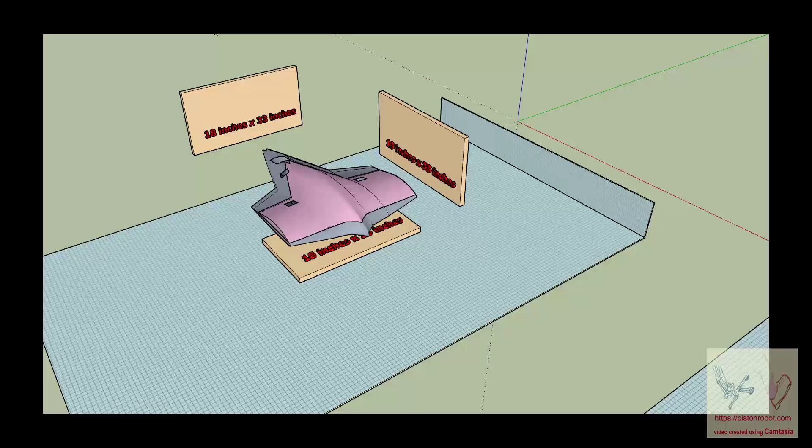We're looking at the Smart Mortar. This is inside of SketchUp Pro 2021. This mortar is made using one of the standard airfoils. It is the AH80136 airfoil. And this flying device has been made inside of an aeronautical program that can give information about the device. It's 4.16 feet long, and it's about 33 inches wide. Thickness wise, it's about 7 to 9 inches.

This right here I'm showing is just the Smart Mortar itself, with nothing inside of it. You can see that these are holes cut into it. Here's a hole right here and a hole right there. And we can actually select this top piece and hide it if we want to, and you can look around inside of there. So there you go.

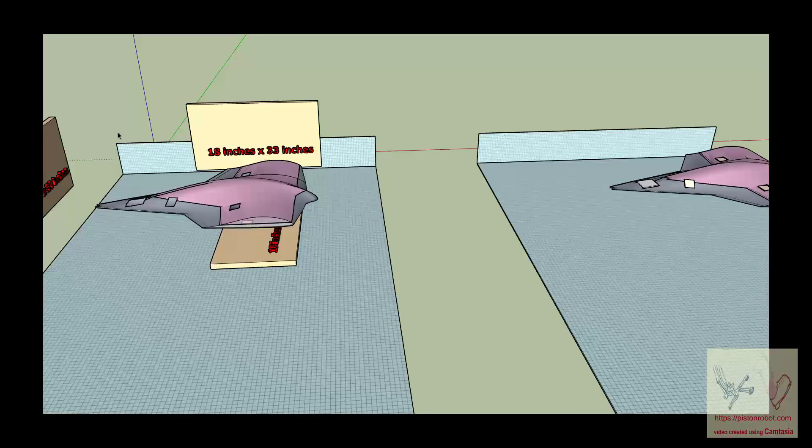These are other views of that mortar, showing that actually inside of the mortar are parts, and these parts include ailerons that can affect the flying of the mortar. Because of the nose pitch down effect of airfoils that have camber, there's an aileron or a flap in the back that acts to keep the mortar from flipping over as it flies.

So use of these ailerons gives you the ability to independently control the pitch of the Smart Mortar. You can also independently control the roll of the Smart Mortar.

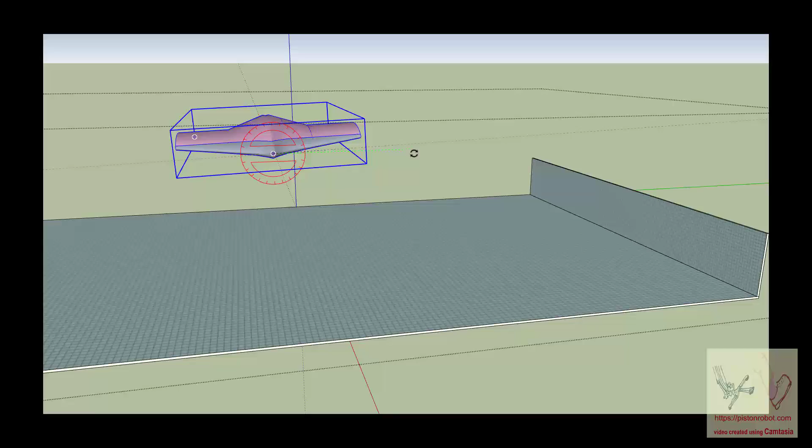And these two ailerons right here, because of how they're located kind of upwards and flat onto the edge of the back of the Smart Mortar, they give you the ability to control the yaw. So this flying device has all of the properties of a normal flying airplane: pitch, roll, and yaw.

The aeronautical program says that the weight of the structure itself is about 21 pounds for the skin. The skin is thick enough that it acts as the airframe structural member. Inside of the mortar is the payload.

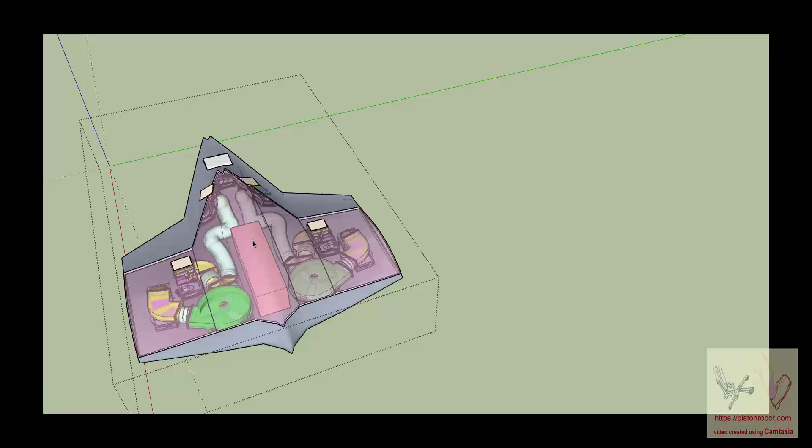The payload weighs 12 pounds. I've already discussed what the payload is with respect to a military device. Again, we can take this top half of the mortar and hide it. So here's the payload. Here are these ailerons. There's the flap that controls the nose pitch over.

Of interest, there are also in this flying device two fans. These fans can go in either direction. This fan can spin in a direction where it suctions air out of this opening in the Smart Mortar, takes that air and blows it out of this side, and there's two different fans.

The effect of these fans is that if the Smart Mortar, either by hitting a headwind or maneuvering, gets itself into an airspeed where its flight control surfaces do not have enough size to control its flight, then it can spin up these fans and blow air to give the ability to do a pitch, roll, and yaw, because some of the air is diverted back here. So it can do pitch, roll, and yaw even if it's flying so slowly that the flight control surfaces are too small to have an effect on it.

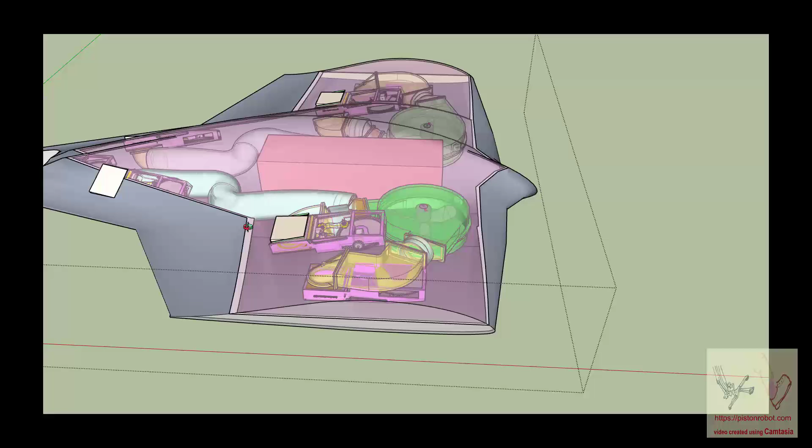And if this Smart Mortar is pointed straight up and given an initial airspeed of 888 feet per second, and if you keep it flying at a very slightly negative angle of attack so it has no lift, then it will fly in a straight line straight up. Based on the aeronautical calculation package, it will fly straight up for 15 seconds.

At the end of 15 seconds, its airspeed will be 163 feet per second, which is 111 miles per hour, which is 100 knots. At that point, the flight control surfaces can bring the Smart Mortar into a nose pitch down, which causes it to go from vertical flight to horizontal flight. At this point, it will be flying horizontally at 163 feet per second. The altitude will be 7,400 feet. The glide angle will be 8.57.

So at this point, the Smart Mortar will be 7,400 feet in the air, flying at a slight decreasing angle of flight. It's not horizontal flight; it will fly 8.57 feet horizontally for every 1 foot that it drops in altitude. And this can all be demonstrated with the aeronautical program. The question that comes out of this is, well, what does all of this mean? And that's the next thing that we're going to get into.

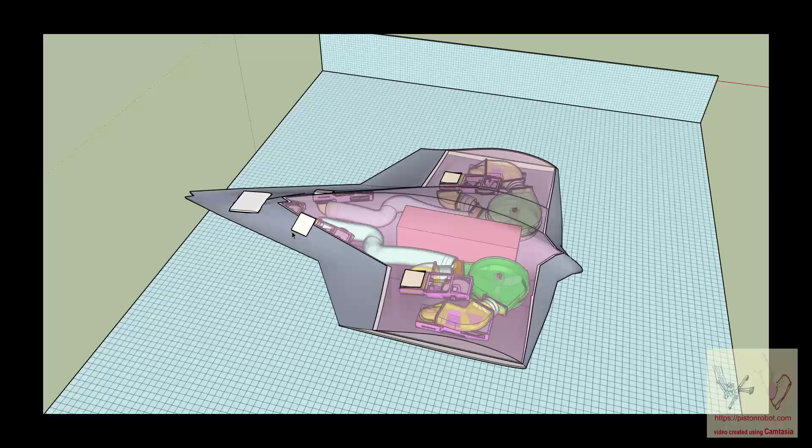But these are just standard ailerons in the sense that, for example, if you wanted to do a roll where the right wing went up and the left wing went down, you would extend this aileron so that it generated an upward force on this wing, leave this aileron flat, but extend this upper aileron. So you have a downward force pushing down on the left wing and an upward force pushing up on the right wing, and it rolls it to the left. This is very basic aeronautics.

Yaw, obviously: if this one extended and that one didn't, it would generate a push that would tend to yaw the flying device off towards the right.

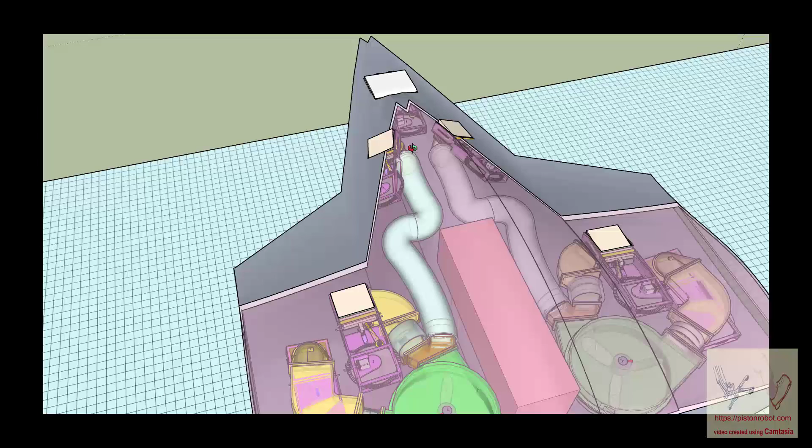Finally, because of the camber of normal airfoils, there's a tendency for any flying airfoil to pitch over. And that's just a feature of camber. Most airplanes have a tail, but this one, because it's going to be launched at very high speed out of a pneumatic cannon, has to have a shape that would allow that. And so this is all tucked down and flat in the back of the flying device during the launch phase. As soon as it clears the pneumatic cannon, this begins to extend and acts to counteract the nose pitch down effect of an airfoil with camber.

And so all of these ailerons here, 1, 2, 3, 4, and there's 2 more on the bottom, all of those are exactly the same. The central flap aileron is different, and we're looking at these 6. They're all exactly the same. And what I'm showing here is the mechanism for how this works. I have picked off of the internet a little drawing, and these are available on the internet for $3 a piece. And here's your size. It's just nothing more than a gear motor.

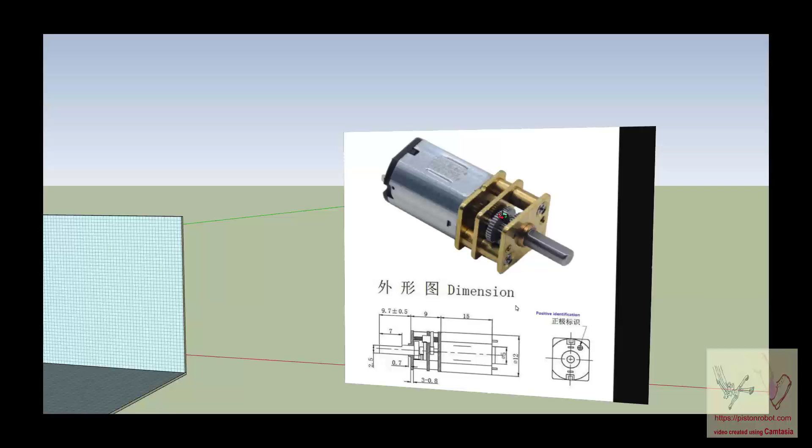And what I did is, remember, this is a device. This payload has 4.5 pounds of C4 in it and other payload features to affect the way that it acts as an explosive ordnance. All of that is discussed elsewhere. So this whole device is going to wind up not existing anymore when it gets to its target. So you don't want to make $50,000 components inside of this thing.

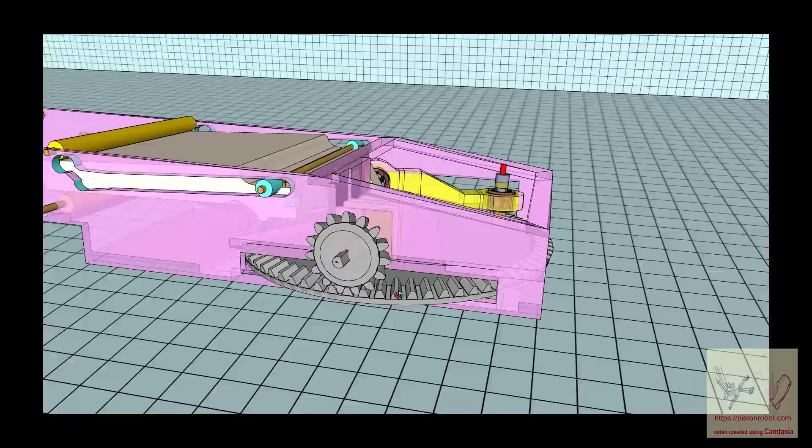And also there may be an argument. Someone might say, well, I don't think that's where the aileron should be, it should be over there. And so I made them where they're all separate and you can move them around and get them wherever you want to put them. All I'm demonstrating here is their normal method of working, and the gear motor generates through the gears a torque, and the torque is increased and can turn this gear here. When this gear here turns, it turns this horizontally oriented gear, and when that horizontally oriented gear turns,

it moves this. These are dual 2-track ball bearing spherical bearings. There's a bolt here. These are just markers so I can move it around without getting confused, but in the real device they're not going to be there. But this would turn, that would go back. There are some structures here on this plate to control and force it to move where it's supposed to.

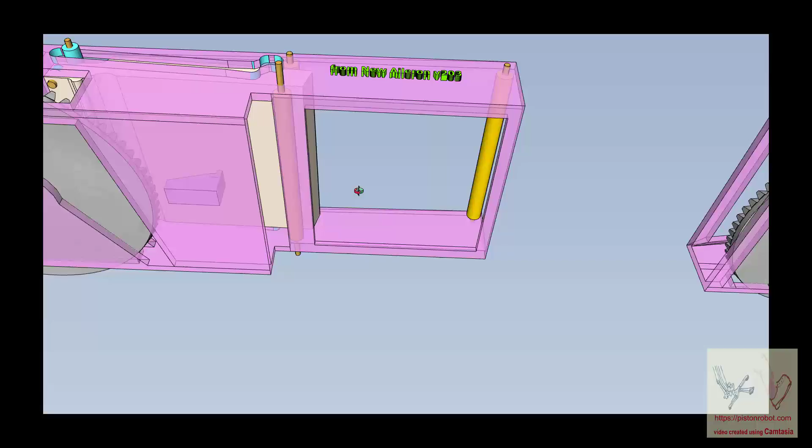Remember that we want this aileron to be able to adjust itself in a manner where you can take air from the fans and blow air through that opening. So you have to have a condition for the aileron where it is not in there at all. It's not in the way. So in this condition, it's moved all the way back. And then as this motor turns, this gear turns, that gear turns, this goes forward, and we're closing off this opening.

And then at this point, this indexes up and sits nice and flat, because one of the aileron requirements is that it protects the interior of the flying device during the cannon launch and acts as a protection for it during high airspeed flying. And you can see here that there are ways that this aileron can move itself and adjust its angle in a manner where it never really opens up the interior of the flying device to the high speed air.

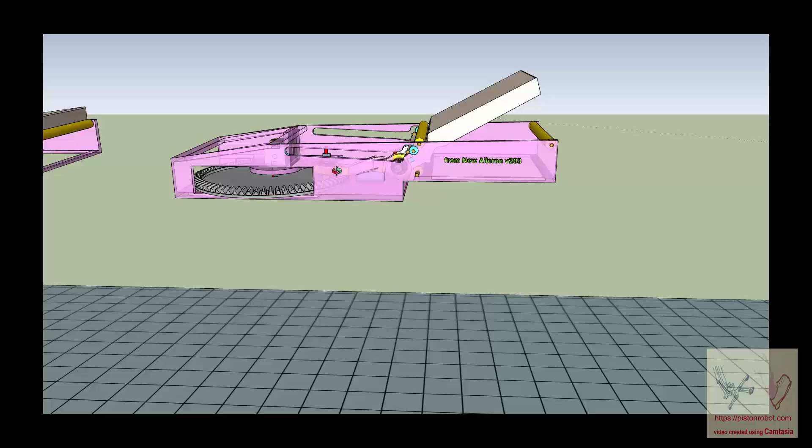And this angle is about maximum 7 to 8 degrees of angle of attack, which is more than enough to control the flight of this thing when it's going 800, 600, 500 feet per second. As it slows down, with further advancement of this motion arm, this thing can extend to give you even more angle of attack, to give you control of the flying device at low air speeds. And so that's it. That's just the aileron that controls yaw, pitch, and roll.

The other flying part that we'll discuss briefly is the central flap in the back that prevents the airfoil shape of the Smart Mortar from doing a nose pitch down rollover, and that's just showing that this is another airfoil. Again, here's the little gear motor that controls it, and it is slightly different from the other ailerons in the sense that this one does not have any air blown up through it, so it doesn't have any use at extremely low speeds where you would vent air to it. It's not needed.

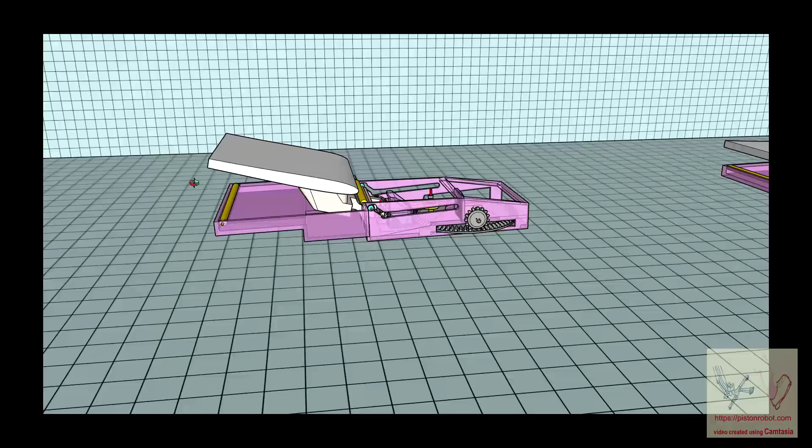It's really for the high speed stuff. And you can see that when the Smart Mortar is launched and it's going through the pneumatic cannon barrel at 800 feet per second, this flattens itself down and is held in place by the strength of these connections. And there's also a little set of wheels here. We can get more details, but when this is all locked in place, this thing is held down and it can't go anywhere. And it stays like that until the Smart Mortar exits the cannon barrel.

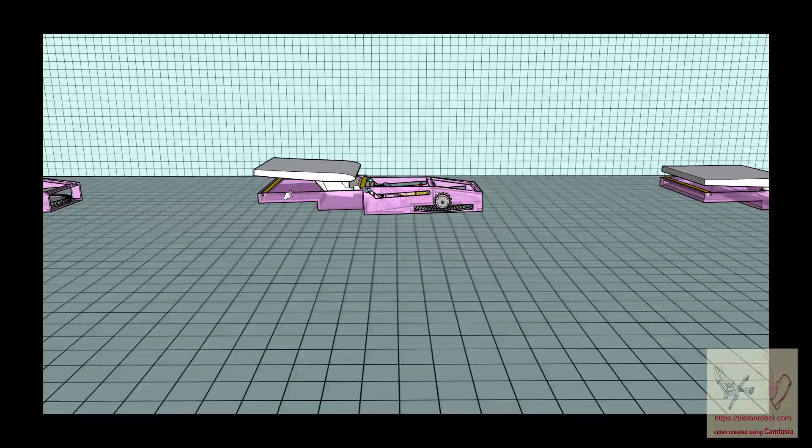Then again, it's the same operating principle as before. This gear motor turns on, this gear turns, it rotates this, it pushes that back. And what happens is first it lifts it up so that it can be like the tail of a flying plane. And it has a little bit of a negative angle of attack, so it pushes down on the back end of the Smart Mortar so that the Smart Mortar loses its tendency to a nose pitch down flip over.

And again, remembering that all of these parts, other than these spherical ball bearings, could be made of plastic. These shafts probably need to be alloy stainless steel. That would have enough strength to control it. Remembering that this Smart Mortar is going to disappear and not exist anymore when it completes its mission. So we do not want a $20,000 central flap either.

And we've discussed the principles of the Smart Mortar in more detail elsewhere. It needs to be inexpensive, where a small outpost could use it, where they could bring the explosive power of this payload against enemy forces. This would be inexpensive enough that the higher level commands would not care if they use it or not. And they would have 200 or 300 of them. They would have their own air force. It would have a targeting accuracy of plus or minus 2 feet inside of its range of 4 miles.

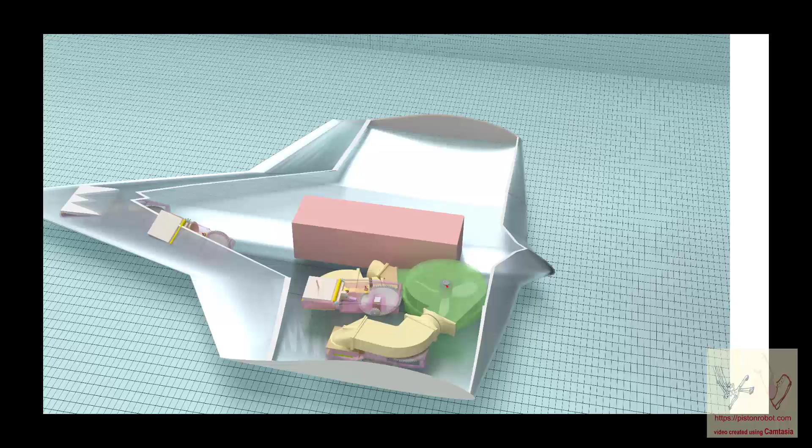I just switched it to a more magnified view. But anyway, the enemy forces would say, look, let's just forget it. If these guys have this 4 mile radius, 8-mile diameter circle where they have this thing, just let them have it. We don't want that property. It's not worth it. All they do is bomb us, all the time with this thing, and there's nothing we can do about it. That was the point of the Smart Mortar. And I think it needs to be inexpensive, or they will never get permission to use it.

And that means I think it needs to not have a motor, because it doesn't have to have a motor. It doesn't have to have a propeller. It doesn't have to have thrust. It doesn't have to have fuel. It doesn't have to have all of the complexity associated with powered flight.

And the problem that comes up is if you keep it at 800 feet per second, which is less than the speed of sound, it only goes up 7,400 feet before it can't go any higher, because it will be at an airspeed that's too low for a decent gliding angle. And I was very nervous that, this is such a great little thing, except it's at 7,000 feet. They're going to see it and simply shoot it. And I just was wondering, how hard would it be to shoot this thing anyway?

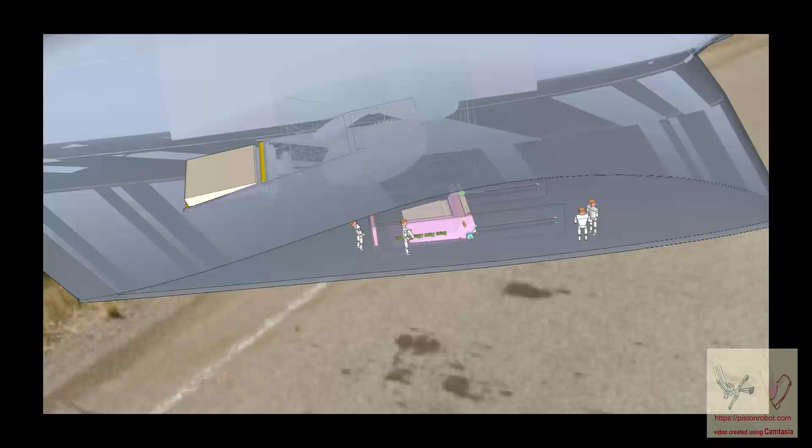And I decided I would make a big one, and I put my little robots inside of it. I was just enjoying myself and having some fun. But I did do a kind of a photo shoot with it up in the mountains, flying along over this road. And I began to work through the issues associated with, okay, it's there, it's in the air, they can shoot at it. Is this really a failure?

And again, this was really just to have some fun. This would be a gigantic mortar. I had a few of my little mannequins that I put inside of it. This guy here, he's kind of looking at the flight controls, and I was going to tell the story that a group of them said, well, we're not flying around in this thing if we can't see where we're going.

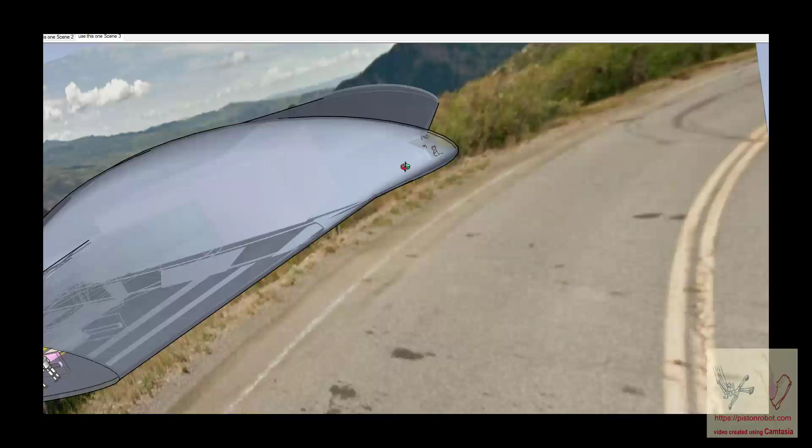So up here in the front of it, I put some windows, and you can see them as it's flying. They decided to do a low pass over this road, and I have them in there in the front of it looking through the window. Anyway, let's go look at the issue of visibility.

All right, before we get to visibility, there's one other thing we should talk about. Here we've got them, they're flying off the mountain on their way to somewhere, and they've launched one, and he's kind of been loitering a little bit, so that the cannon construction is probably going to be able to launch about once every 30 seconds, maybe every 40 seconds.

So when you launch this one, if you want them to come in and land on the target, bang, bang, this guy kind of has to loiter a little bit so this one can catch up. And I wanted to bring out the understanding that there is space in here. You saw all those parts, but there's space in there, and you need flight control.

Flight control is going to need microelectronic solid state circuitry. Probably drill a hole here and a hole here, and let the device itself be a pitot tube so you can get altitude and airspeed. There'll be a GPS in there so it knows where it is. There'll be an incline measuring device to measure inclination of the device in all three axes.

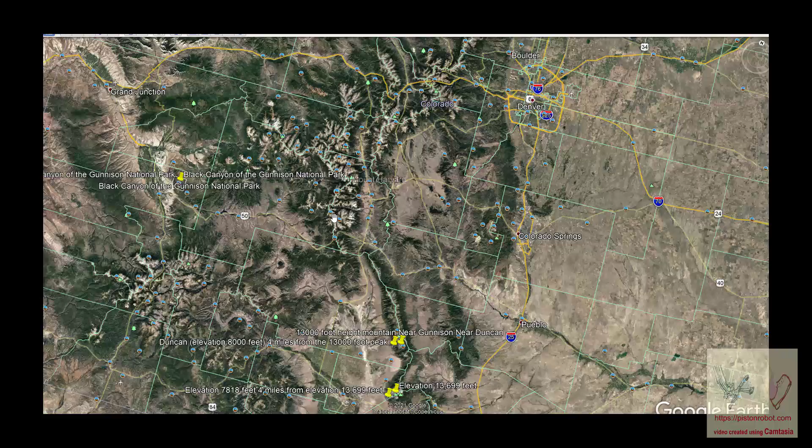Google Earth seemed unhappy about showing me the Grand Canyon, so I decided not to do that and went nearby and looked around and found this Gunnison, Telluride. Gunnison is a national park around in here somewhere. Gunnison National Park, and you can see there's these mountain peaks, or no, they're not really mountains, they're just high hills. All right. Well, I had to get some rearrangements here. There's the Grand Canyon.

When I did this before, I could not get Google Earth to show me the Grand Canyon. I don't know why. But it wouldn't. You can see down here, we got the longitude and the latitude and the elevation of the ground. It's not the elevation. The eyeball elevation is 1,300 miles. The ground itself right here is 1,200 feet. Okay? And since Google Earth would not show me the Grand Canyon that day, I decided to go somewhere else. And I found this Gunnison National Park.

And what I wanted to do, one of the things that Google Earth has is Google will take its little car and drive along, and the car has a camera in it. Here is Gunnison. And the camera does a street view version of the view. So, for example, we can take the little street view.

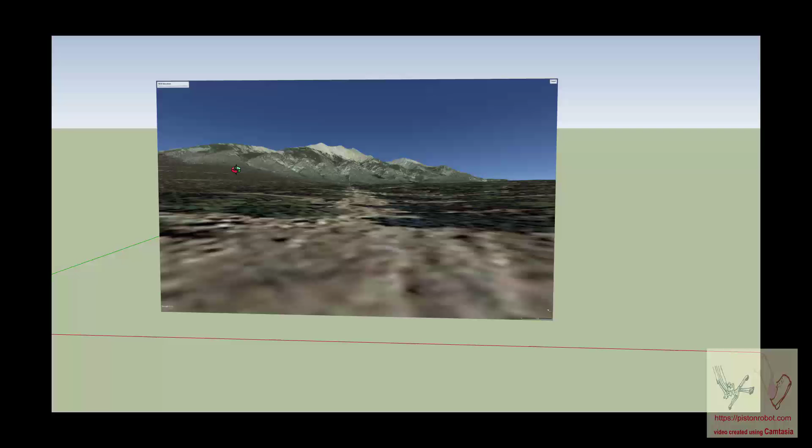And one thing I can say is that, from a physics viewpoint, this part of this image is what we call, I think, flatland, the horizontal part. And this part of this image going this way is the vertical part. So we can actually cut this image in half. And it allows us to put it into the 3D drawing program. This is not perfection level imagery, but you'll see what happens.

So I went and cut it. And this is nothing more than the flat horizontal portion of the picture now existing as a horizontal plane. And this is the vertical portion of the picture now existing as a vertical plane. And I put sea level at zero feet. And if you go up from there to here, you get to 8,156. And so that little guy at Gunnison was standing at 8,156 feet.

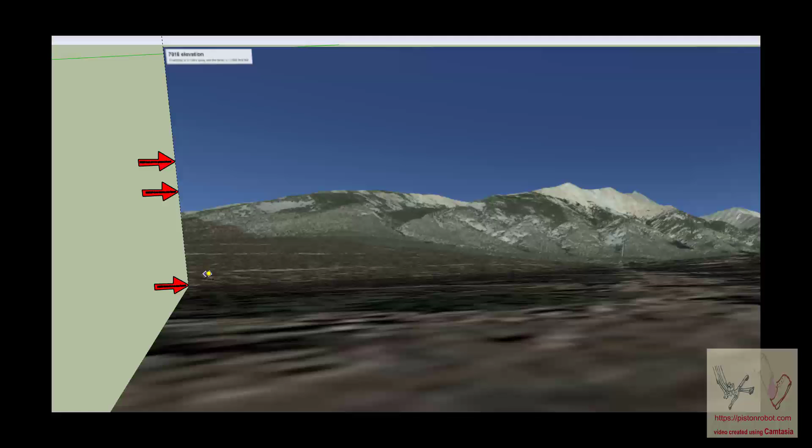So we now have this as 8,156 feet, and we happen to notice that that peak was 13,699 feet. And so this distance from here to here, again, SketchUp does all this data for you, but if you go up to here, we've gone up 5,531 feet. But if you go down here to sea level and go up, it's 13,684 or whatever. I mean, it's at that level.

And so the mortar itself flies along at 7,253 feet. But again, that's going to be 7,253 feet above this ground level down here. So if the Smart Mortar was flying around, it would be right up in here. And the other thing I wanted you to see, from here to there is 4 miles. So that's the range that this Smart Mortar flies through.

And one of the limitations of the 3D drawing program is that it just creates a space of how much space it's drawing in. And if you get little tiny things inside of great big spaces, it gets where it won't show them.

That's how it is. And I got these lines in here for no reason other than to just show me where I'm supposed to be looking. But if we come zooming in here, you can see that now I have a little trouble drawing humans because they're such rounded organic shapes.

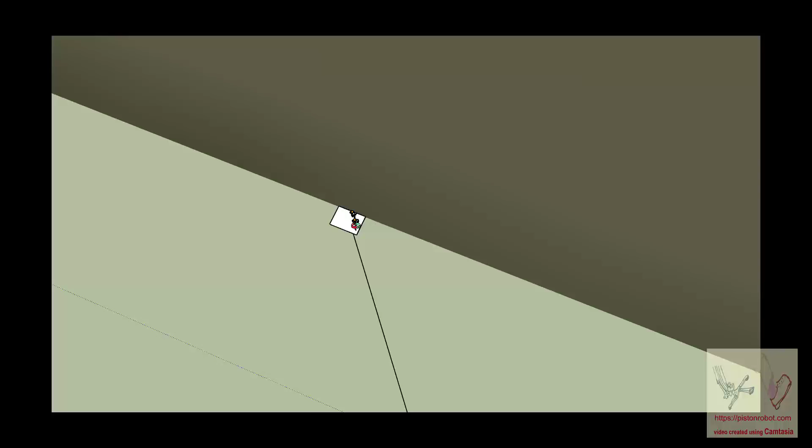And I've got these little mannequins here sitting in as observers. And I'll show you what they look like. I can't get much closer than this to them in this view that has a panorama as big as this in it. Okay, so this is the two little

mannequins, and they are my representation of a human from the top of his head to the bottom of his foot is 6 feet. So he's 6 feet tall. He's got a head and face, eyes. One guy's sitting here, and they're sort of sitting on this little platform right here, and they're looking over to see the Smart Mortar flying around.

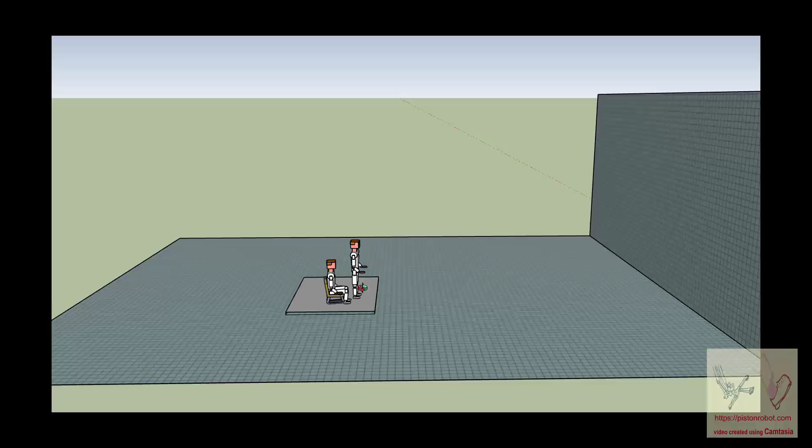And this I can show you at great detail because this is the only thing in this picture. But when we take this little image and put it inside of that other image, SketchUp just gets all mixed up. And we'll go back to that in a minute, and we'll show you some other things.

All right. Hello again. So we're looking. We got these two little guys. We've told them, you know, this is a military setting. We could, if we wanted to, say, all right, these are enemy people. And their boss, they're all over here, this crowd eating lunch, and they sent these two guys over to watch for the Smart Mortars, because you never know when those Americans are going to send a Smart Mortar against you.

And so the big group of 6, 7, 8 people and the 3 or 4 trucks, they're sitting over here eating lunch. These two guys are supposed to be watching for the Smart Mortar. Just keep that imagery in your head. And just one more time, we will zoom in to the situation that these two guys find themselves in, where they're sitting in their chair.

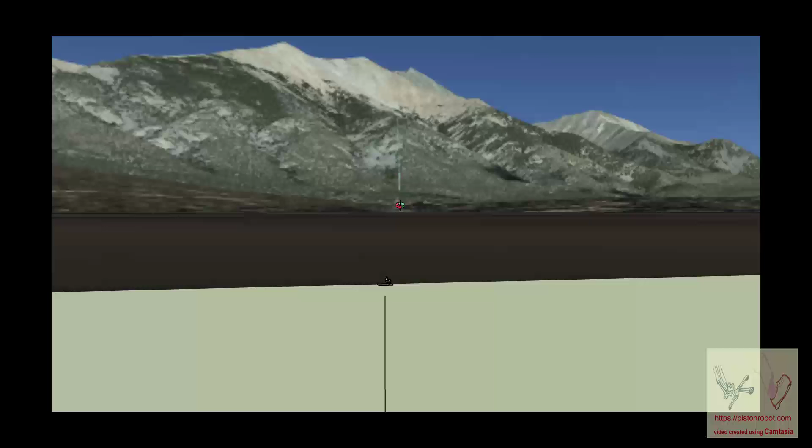And I just remember this line says where they are. So to try to get some image of what they're going to be seeing, it kind of looks like this. This green line is something to do with Google. I think it marks where the county line is. I don't really know what it is, but it's a green line that was put in there by Google. It's not on these mountain peaks. I don't think that's snow. I think it's just sand.

But there they are. These guys are over here eating. They're watching because the Americans are up here and they have this mortar and they can launch it. And of course, this could be completely flat land where the Americans are over here somewhere. I just wanted to give you something that you could look at that was 7,000 feet tall. And this is 5,500 feet tall. So if the Smart Mortar was up there, it would be up here.

And of course, I guess they're going to be eating their sandwiches too, because they don't see anything. And if you had a pneumatic cannon down there firing off the Smart Mortar, I don't think you're going to hear it at a distance of 4 miles. But they're looking. And the question that comes up is, what are they going to see?

And actually, the issue of seeing things in the military has been around for a long, long time, because prior to GPS and satellites and eyes in the sky and radar, particularly on the ocean, if the captain said, hey, look, are there any boats around here that could be shooting at us? The guys would look back at him and say, well, no, we don't think so. And he'd go, well, why are you saying that to me? And they'll say, well, just because. We got some guys looking around outside of the boat and we didn't see anything. So looking around to see what you see is something that's been in the military for a long time.

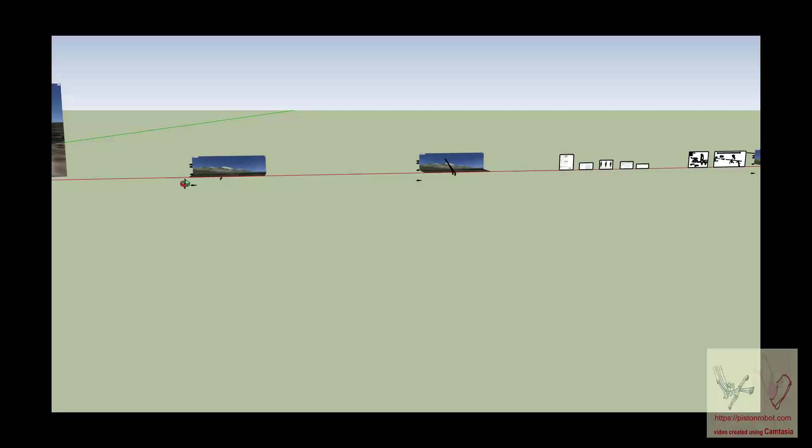And what I've arranged for you here is, you know, going down the primrose path, and let's just look at some stuff. This is a military dynamic research 1991 final report, public distribution, Air Force Systems Command, just identifying it. They went and discussed when people are looking for something. This is this guy Johnson, and said, well, how can we scientifically discuss looking for things?

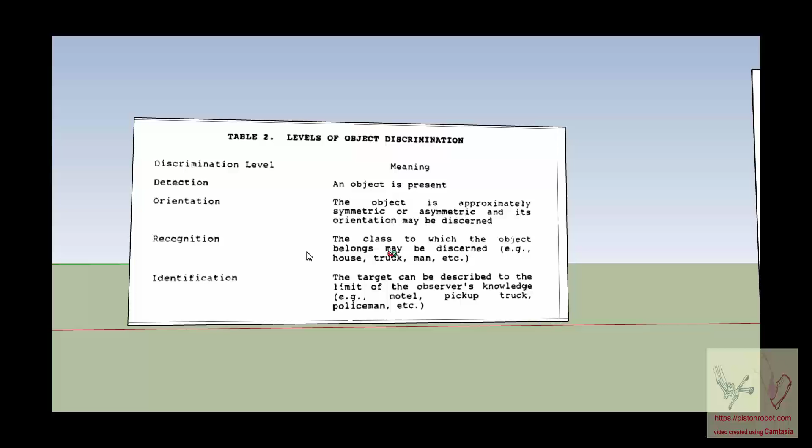And he said, well, I'm going to divide it from the very beginning where you don't see anything, to the situation where you might see something, to the situation where, yeah, I know I'm seeing something here, to the situation of I've seen something and I know what it is. So he went from detection, I can see something; orientation, this object is symmetric or not, and it's either more vertical than horizontal or more horizontal than vertical; recognition, it's probably something like a truck or a house or an aircraft carrier; to I know what this is.

And what Johnson came up with has to do with the resolution of the human eye. Resolution in seeing is the level where you can distinguish between two things. And the actual way that resolution works is it's related to an angle, the angle that the object subtends as your eye views it. Because, for example, you can see a human hair in someone's fingers if he was holding it up. But if he started walking backwards, even though you can see a human hair, if he gets far enough away, you can't see it.

And the same thing with a Chevrolet Suburban driving away from you on a highway. It's a big old car. But if it gets far enough down that highway, you are not going to be able to tell if you are seeing it or not. And so what they discovered was, with respect to seeing things, you have to put in this angle that it subtends. And the angle that a human eye can resolve is about 1 arc minute, or a line pair.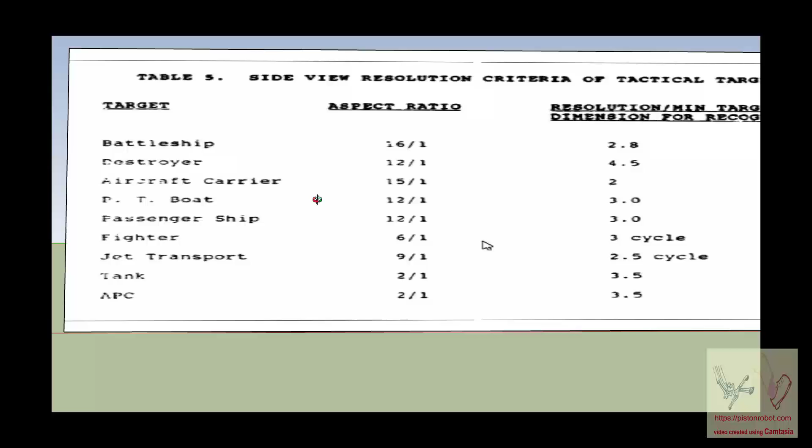And the other thing I wanted to show is they looked into what happens with respect to recognizing something when the height of it is greater than the width, or the width of it is greater than the height. And these are just some aspect ratios of different things. But what they're showing is it still is 2 or 3 or 4 arc minutes or line pairs.

Remember, the line pair for humans is 1 arc minute. Line pairs are more related to video equipment, and arc minutes are more related to living structures, but they're both the same thing. It's 3 to 4 arc minutes that you need to recognize what you're looking at. And so let's take a look at that and see what that tells us.

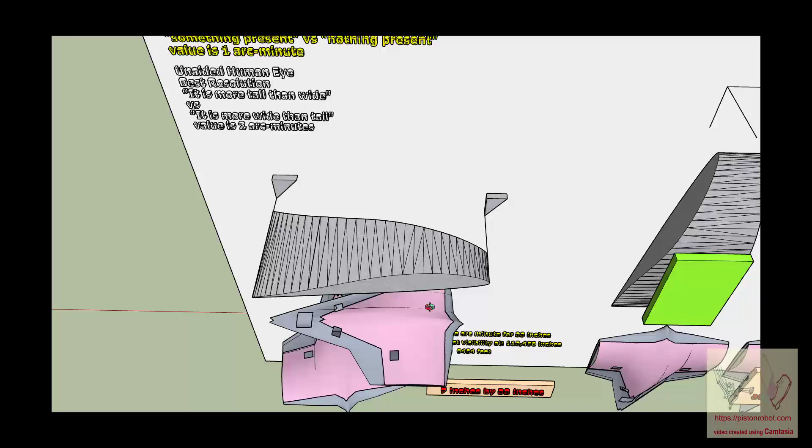I had some drawings where I had a simple representation of the Smart Mortar, and I was hoping to make one that looked like this because I think it'd be easier to get this to go down a pneumatic cannon. But from an aerodynamic calculation program, this will fly and work. And I don't know what this will do. So it really got turned into this. But we can look at some things.

Unaided, not binoculars, unaided human eye, best resolution, something is present. That's just recognition, 1 arc minute. Best resolution for it is taller than it is wide or is wider than it is tall is 2 arc minutes. So now we have to look at this resolution of the angle that the object subtends in your eye.

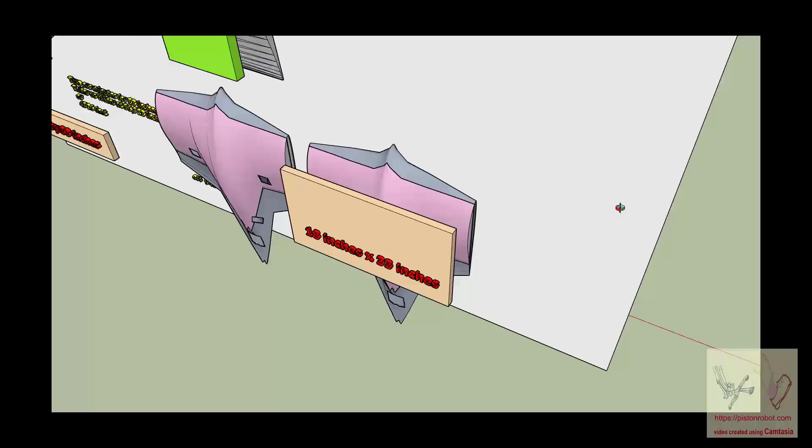And as you can see, the little Smart Mortar, it's pretty, it's aerodynamic. I have a problem with it in the sense that I really think this is pretty, and I can't tell if I think it's pretty because I created it or because it's pretty. It's just neat. And if you look at military flying things, particularly ones that have been around a long time and were very successful, they're pretty and they look like birds. My son said this looks like the peregrine falcon when it's pulling itself into its dive. But that's a digression.

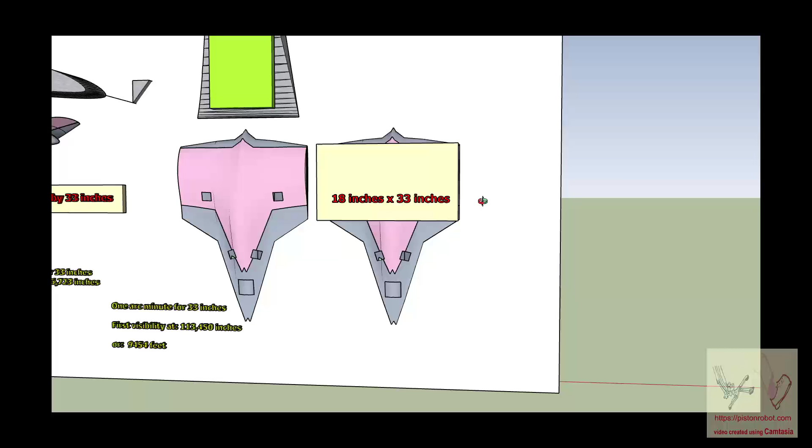Okay. So we have to come up with an opinion of, well, how big is this thing? And it's a dimension, so you can't take all these curves and give it a dimension. And this box is showing that it's 18 inches long by 33 inches wide in the bulk of its dimension. Remember now, at some point this thing is going to be pointing its nose down and diving down at the people. And when they're looking at it this way, it's 7 inches tall by 33 inches wide.

So, using the aeronautics program, we took it, and this board here is a board that has the dimensions of what our order of magnitude is. So if we go up here, we're at 7,200 feet. Okay, and if we go over here, from here to here, so we'll mark this, and we'll mark that, and that is 21,000 feet, which is 4 miles. And this is the beginning of some of the weird stuff.

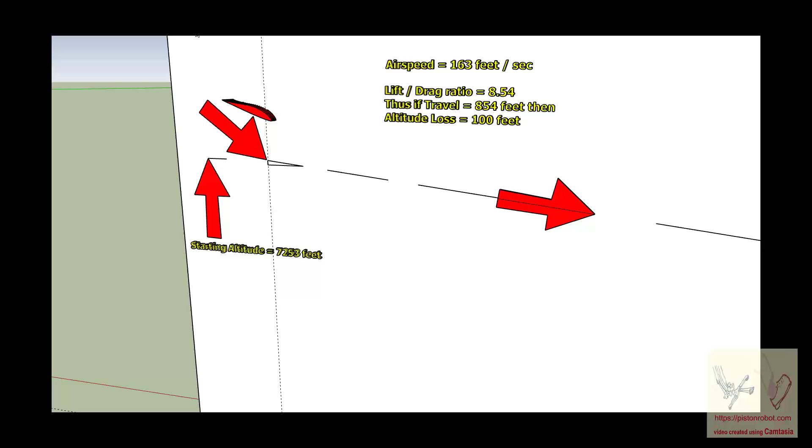You may be saying, well, what is the point of this arrow? And it's because, well, why don't we just look at the Smart Mortar? And I'm like, okay, let's look at the Smart Mortar. Well, is there one in there? This one's in here, but this one is a demo Smart Mortar to show us, because this one happens to be 1,026 feet long. Now, I don't know. I have a feeling that there are pilots who are like, oh yeah, you're running into the pilot thing, which is nothing is what you think it is when you get into the three-dimensional space and you're miles in the air. But it's okay. We'll go look around.

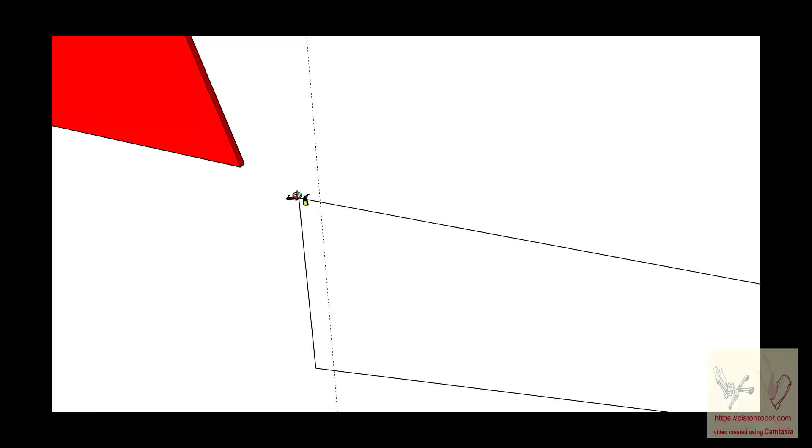And we're like, why can't we talk about the real mortar, the Smart Mortar, the one that's flying around? And I'm like, well, okay, we probably could. Oh, wait, what did we just see there? What was that? Oh my, there it is. There's the Smart Mortar. And you can see, once again, this computer system can hardly show something as small as that Smart Mortar if it's placed against the scale of the spaces that we're working in. There it is. There's that 18 by 33 right there.

And of course, the other thing that we're looking at is the glide angle, and it goes from here to here. This is 100 feet, and this is 854 feet. So that's a glide angle of 8.54. So we took it from our pneumatic cannon and we shot it straight up. And the way we got it to go straight up is we kept adjusting the angle of attack so that it has no lift

because you have to remember, if the Smart Mortar, we'll take this Smart Mortar, if it's a flying device, then the lift that it generates is that way when it's going straight up. So if you don't get the lift to be zero when you launch it out of the cannon, it's going to go up in the air and come down and land right back on top of your own soldiers, because the lift is directed that way.

So the lift pulls it over and it comes around and it lands on you. So you have to keep adjusting the angle of attack of this device so it has no net lift, because the lift is not lift up, it's lift sideways. But if you do that, it goes up 7,253 feet or whatever it is. And at that point, it is now at 163 feet per second.

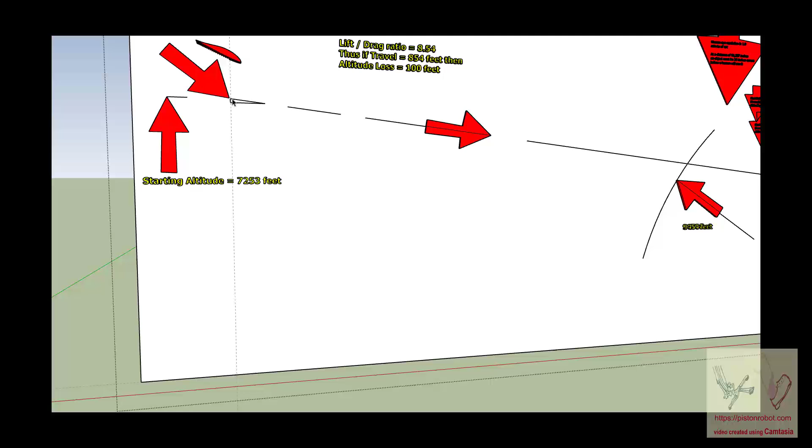And again, you take the nose down. So when you do that nose down maneuver, it's important to understand that it is pointed straight up. Remember, you're not actually talking to it. This is a fire and forget weapon. The inner programming says do a nose pitch down maneuver.

So when it does a nose pitch down maneuver, it brings itself to almost horizontal flight, a little bit of nose down because it's gliding on its glide slope. So it pitched its nose down, but that didn't make it point at the ground. It made it into level flight because it was pointed straight up when it did its pitch nose down maneuver. Weird stuff. So now it's flying along.

And remember, we got these guys down here eating their chicken sandwiches, looking into space, watching for that. And again, there may be pilots and other military observer types who are like, I know what you're getting ready to do here. But let's go ahead and use our arc minutes and see what happens. The resolution is 1 arc minute. That's just saying it's there.

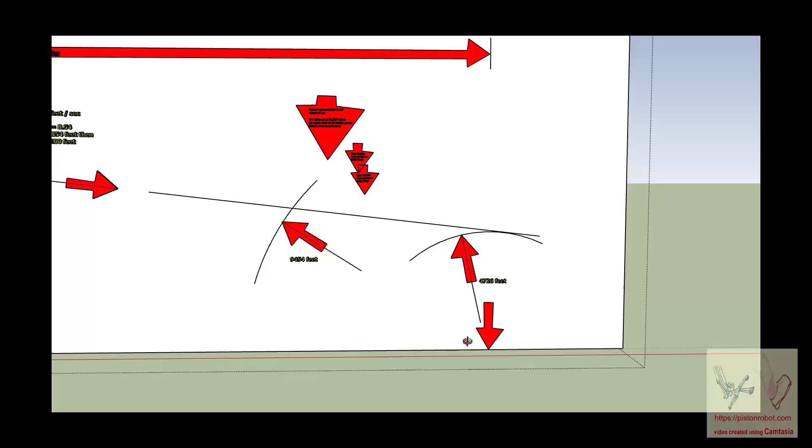But I'm telling you, you gotta think like a pilot, because what did we happen to sit down here just for the purpose of scale? Here's our two guys eating their chicken sandwich again. And these two guys have been given the job of watching for that Smart Mortar. And again, it's so big that when I turn this and get this tiny little image of them looking up there to see that Smart Mortar, the question is, where is it? And the answer is, if it's beyond 9,454 feet, they're not going to see it at all, which is just crazy.

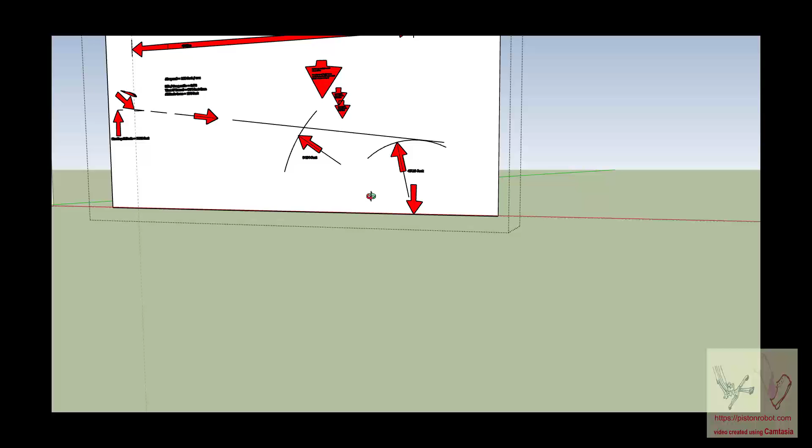And if you convert it over to pointing straight on at them, the arc minutes for 7 to 8 inches gives a distance of about 1,000 feet to 2,000 feet of when they're going to see it, which means if it flies along like this, right here, if it points its nose down at them, they're not going to see it until it's 1,000 feet away from them. And that's just like, this can't be true. But we can explore a few more things and see if we really believe that. And that's our next discussion point.

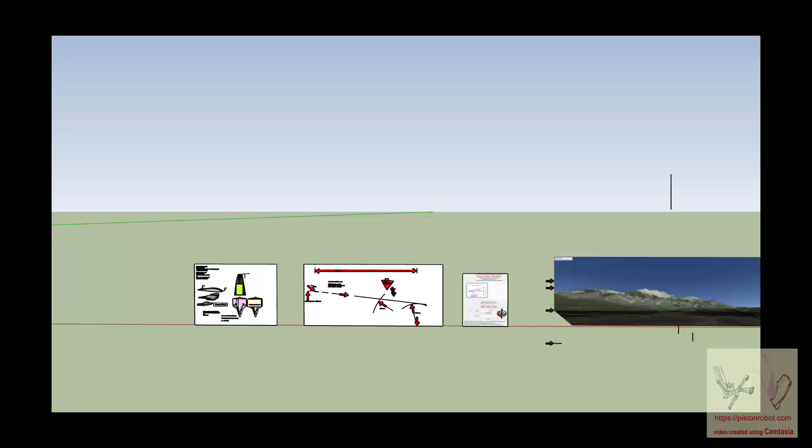And again, if we go back over here and we look at recognition, identification here, there look 5, 6, 7, 8 arc minutes. Remember, the 1 line pair for a human is an arc minute. So this is 6 or 7 arc minutes. Recognition is 4. And even with items that are wider than they are tall, it's still 2 to 3 arc minutes.

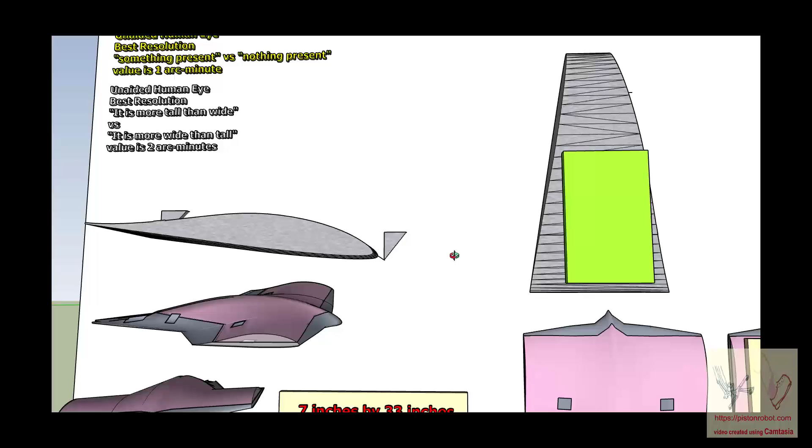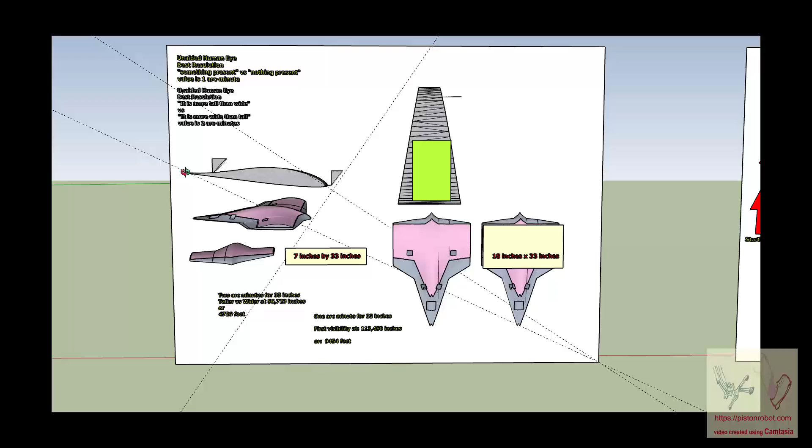And so if your observers are far enough away from the Smart Mortar, they're really seeing this distance, not that distance. I have a feeling probably it doesn't matter. It's just something to remember, which is why I was putting out distances here on this board for 28 inches, because if you calculate it out, this 33-inch Smart Mortar becomes 28 inches. But let's just leave it at 33 inches.

And the question is, remember, 1 line pair or 1 arc minute is when this structure begins to be where a human being can't tell if it's there or not. So even though this is wider than it is tall, we'll just use this large dimension. As I looked at the research, I could not get them to answer if it's wider than it is tall, what dimension are you supposed to use? Are you supposed to use the diagonal? Are you supposed to use the square inches and convert it to a square? What number are you supposed to use? But we'll just use 33 inches.

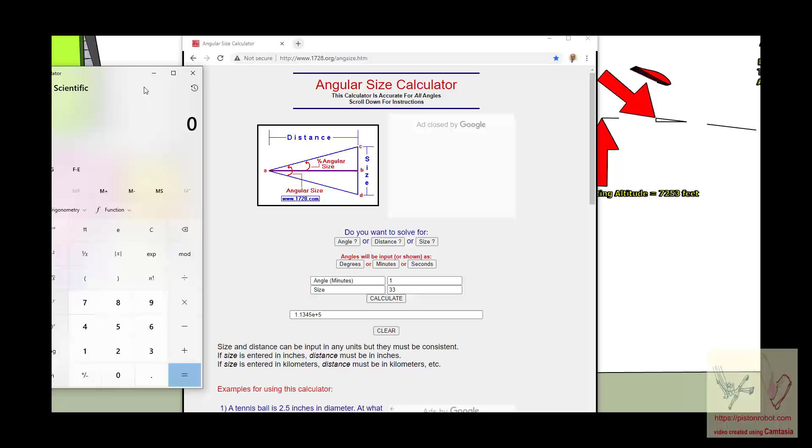Okay, and I've actually turned it on. And remember the size of it. Let's calculate for what is the distance where the human being will not be able to see it. So we want to solve for distance. The angles that we're using are arc minutes. So 1 arc minute. The size is 33 inches. What is the distance? And this is 113,450 inches, which is 9,454 feet.

That's 1 arc minute. So at 9,454 feet, this 33-inch wide structure, a human being would not be able to see it. And I thought that I would just give you a demo of that. And we run into the issue of, with scale, it's difficult for the computer to show you little things compared to big things. So here's our little guys. They're the guys that look to see if they can see anything. These are some guys that are going to help us. I asked them if they would do an experiment with us, and they said okay.

These are my mannequins. They're pushing the wagon. This guy's driving it. This guy's pushing it. This guy is holding up the Smart Mortar. And those mannequins are 6 feet tall. So this whole structure from here to here is 9 feet. So it's 9 feet tall. But remember, this little mortar is only 33 inches across.

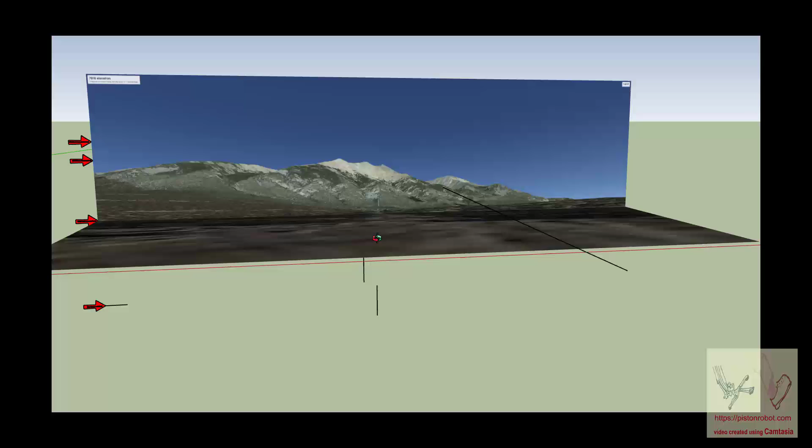And so again, I'm going to start this with the SketchUp program. Here's our roadway. This distance from here to here is about 4 miles. And we went down in here and we put this little cart here, put it on that road, and we said start pushing, and we're going to have these guys look at it and see when it turns out that they can't tell if he's holding up the Smart Mortar or not.

That would be 1 arc minute. 2 to 3 arc minutes is where they would be able to say, is he holding up a trash can lid or is he holding up the Smart Mortar? And that's 4,726 feet. And the problem that you get into with this program is that it really is not able, it's just the program.

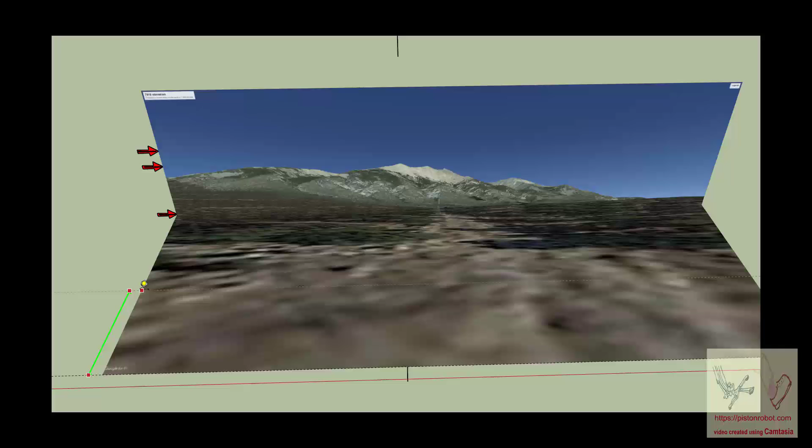And again, you can see that the distance to the mountain is 19,000 feet. So right here, it's gone. They're pushing down this road, and you have no idea if they're showing you the Smart Mortar or not. And that's pretty weird. All right, let's see what else this means.

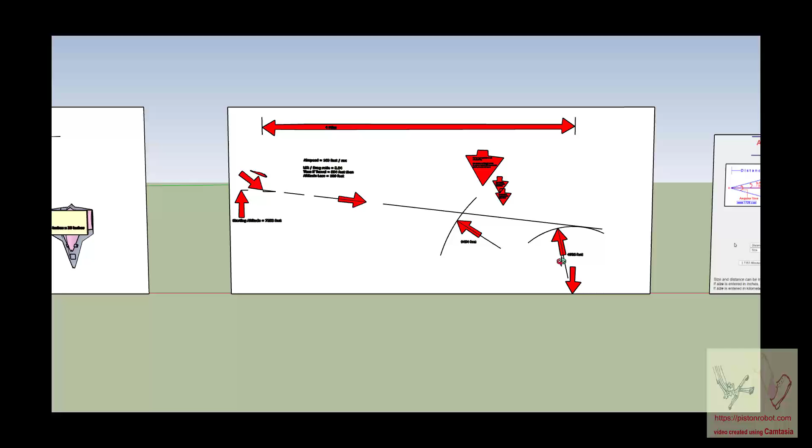So we're looking at the profile of this flying Smart Mortar. We have a little complexity when you're looking at it dead on. This is 7 to 8 inches, and that's 33 inches. And again, I'm not completely sure what distance you're supposed to use. Now, this is when it's coming down at you. You want to know that it's the Smart Mortar so you can make a decision about what you're going to do.

I don't know that it should be 7 inches. It's hard to say it would be 33 inches. Like I said, I couldn't find in the research how you're supposed to do that. But remember, with the battleships and the 12-to-1 length to width ratios, they were using 3 arc minutes. So let's just take 33 inches and use 3 arc minutes and see what happens.

And we took 33 inches and we put our 3 arc minutes in here and we calculated the distance. And that comes to 37,815 inches. So 3,000 feet, 3,100 feet. And I think that's conservative.

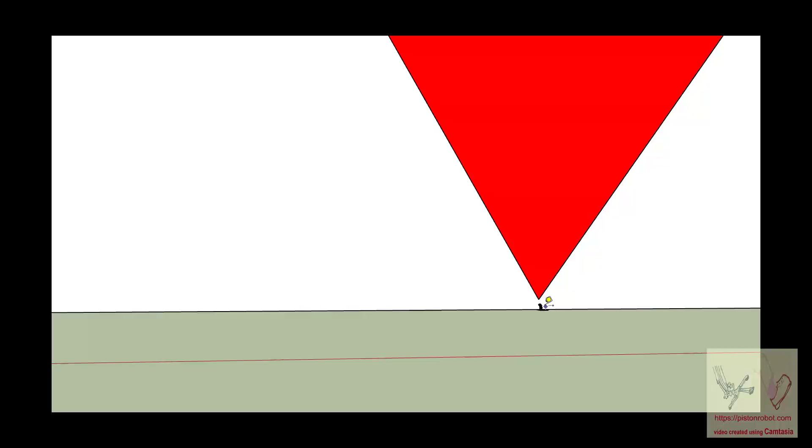But what that means is you can put your distance measuring at the level of this guy's head and go out here, and right here there's your 3,000 feet. So here is where it became invisible because they're looking at it flat on. So if it turned itself, when it came down at them, they wouldn't see it until it was right here.

And one of the things that happens when it's not on its glide angle is that there isn't a balance of forces. There is extra force left over from gravity to pull on it, so that when you take a flying object off of its glide angle and point it down, it begins to accelerate, and it will continue to accelerate. The magnitude of the acceleration depends upon how much gravity force is left over to pull down on it. And it only stops accelerating when it hits the ground or when the drag from its velocity is equal to the excess gravitational force. And so it gets up to about 200 or 300 miles an hour.

It was at 100 miles an hour. Now it's at 300 miles an hour. And 88 feet per second is 60 miles an hour. So 300 miles an hour divided by 60 is 5, times 88 is 440 feet per second. So 3,151 feet divided by 440 is 7 seconds. So when they finally see it, they will have 7 seconds to make up their mind what they're going to do about this. That is not much time.

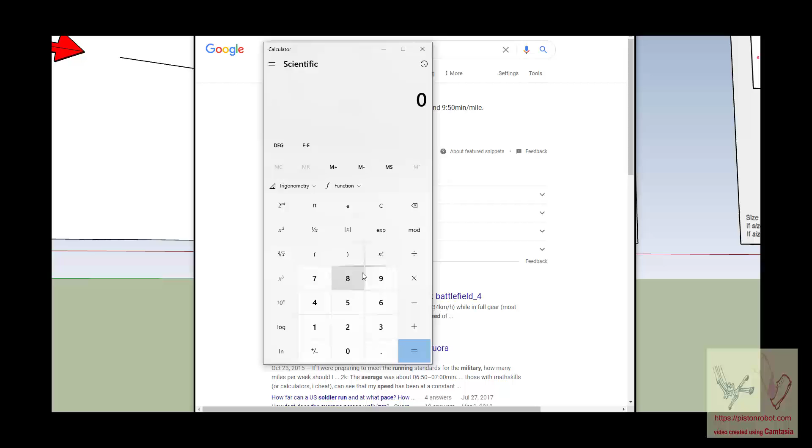So 8.8 times 7. So if they saw this thing and turned around and ran, they would get 61 feet before it hit the ground and blew up. And it's carrying 4 pounds of C4 and configured to create shrapnel. I don't know that you would be safe from 4 pounds of C4 at 61 feet. And this includes that they immediately figured out what they were seeing when they saw it, which I don't even think would happen.

I think when they saw it at 7 seconds, it would take a second or two for them to say, oh my, that is one of those smart mortar things. We need to get out of here. So now it's more like 5 seconds. And that's 40 feet, which just, they're not going to be able to run away from it. And this is one of those conclusions where you're just saying to yourself, whoa.

Because what it means is the smart mortar is invisible, will never be noticed. The only way you'll see it is if you happen to be looking directly at exactly where it's coming at you from. And once you see that, you have somewhere between 5 to 7 seconds to do something, which I think it really is just not going to happen. That's weird. That's not what I thought the answer was going to be.

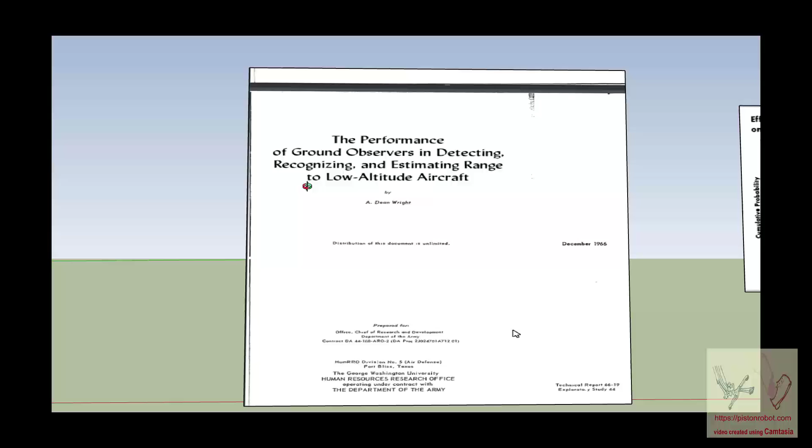Again, performance of ground observers. This is the military, 1966. They're still tangled up in this business of seeing things in the air, flying along, and trying to figure out how do human beings do that? What is their response? What can they see? What can they not see? How do they identify stuff? This comes extremely close to what we're talking about here, because these are flying objects in the air and they're working through what is the science of all of this. And I could spend hours going over the research, but I'm not going to.

Range, propeller, helicopter. Okay, this is the chance that they saw it. These are different flying devices. The U-1A is seen sooner, but it's bigger. The one we decided to look at is this U-6A, which is an airplane. And for some reason known only to the military, a company makes a product and then the military gives it 7 or 8 different names, which is fine. I don't mind. I think it has different uses in the military, but it can get a little confusing. So let's look at this.

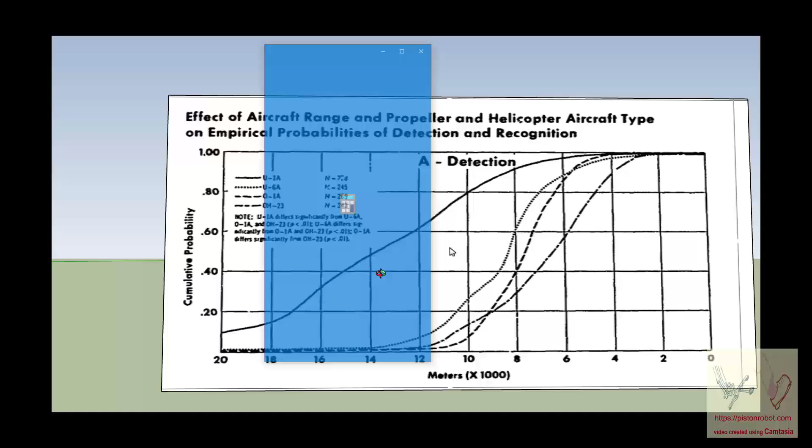And the U-6A, the 50% point, is right around 8,000 or 9,000 meters. Okay? Maybe 8,500 meters. And that is essentially 25,000 feet, 4.8 miles. So they see this airplane at 4.8 miles. And let's look at some other values.

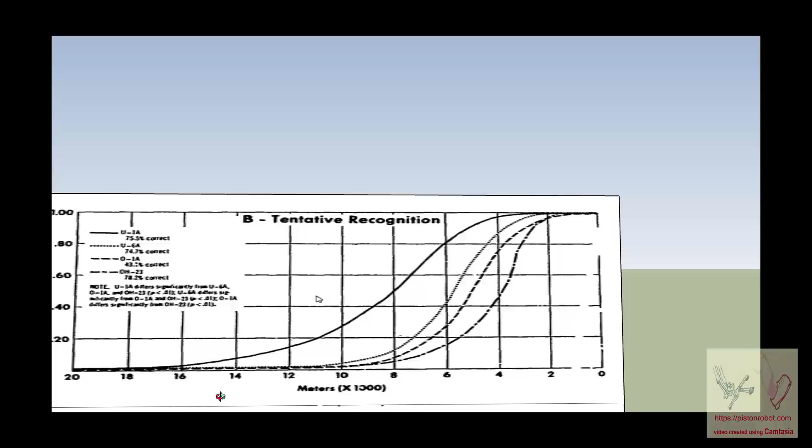This, by the way, was just that same deal. Here we go again, detecting it. I think I see something. This is, well, I know what it is. And again, the O1A at the 50% level is 5,000 meters. And we have this calculator by Unicon. This is such a cool calculator. It prevents you from making stupid mistakes. All right, so we're looking at length. O1A, 50%, 5,000 meters. So let's convert meters. This is so great. Well, it's so great if you're like me and manage to constantly confuse yourself.

Meters to nautical standard miles, I think. Okay. That's not right. All right, sorry, I got it straight. So a mile, parentheses, S, is the miles we're talking about. So now let's convert meters into standard miles. And this, I'm sorry, it was 5,000 meters.

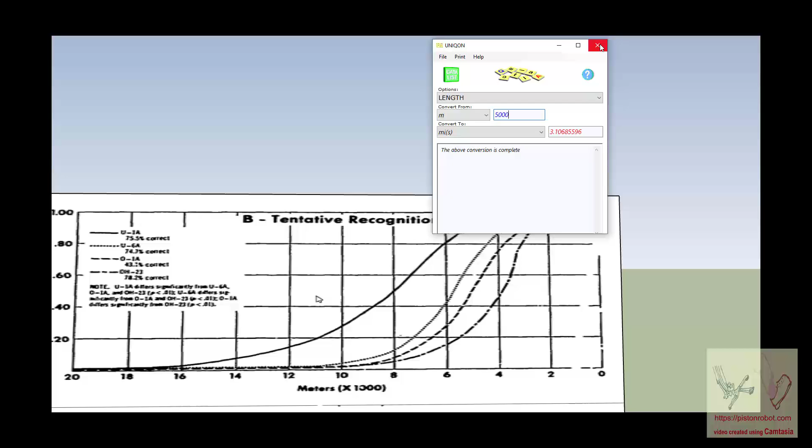And this is the exact relationship that we've been talking about the whole time, which is the difference between 4 to 5 miles, I think I see something out there, and 3 miles recognition, oh, that's an airplane. All right, so let's see what else we found. Positive recognition, where they really did get exactly right what it is. There's our O1A, which is down in through here, and that's at 3,000 meters. And then some other stuff in this study.

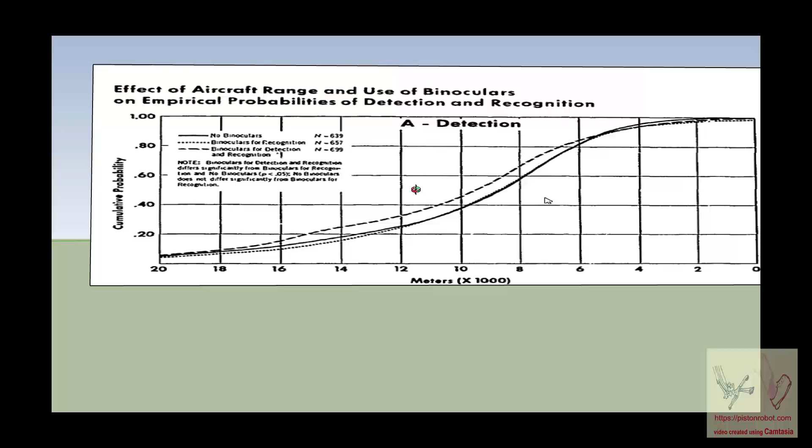I've been telling you the whole time, anytime you get into flying and aeronautics and people who are not pilots in the air doing this and that, everything is so weird. Here is where they said, well, you figure out what this is and don't use binoculars. You figure out what this is. If you think you see something, pick up your binoculars and take a look. This is, you can do whatever you want. You can look around, or you can use your binoculars to look around. You use them when you want to, or you can use them all the time.

They, of course, scientists are always looking for statistically significant stuff. But the truth is, looking at this, there's hardly any difference in these curves. It's crazy.

Here you can see this is the one they thought was significant, where you're using the binoculars all the time. The 50% is 9,000 meters. And the no binoculars is 8,000 meters. So what? 8 or 9, here's 8, this is 9, so 8,500 versus maybe 10, 2,000, 6,000 feet. That's all that the binoculars give you.

So when you say, oh, yeah, but they're going to see the Smart Mortar and they're going to have binoculars and they're going to know what's going on, and everything that you've been saying is completely not true, well, there you go. Here's the study. And here's some airplanes that we made.

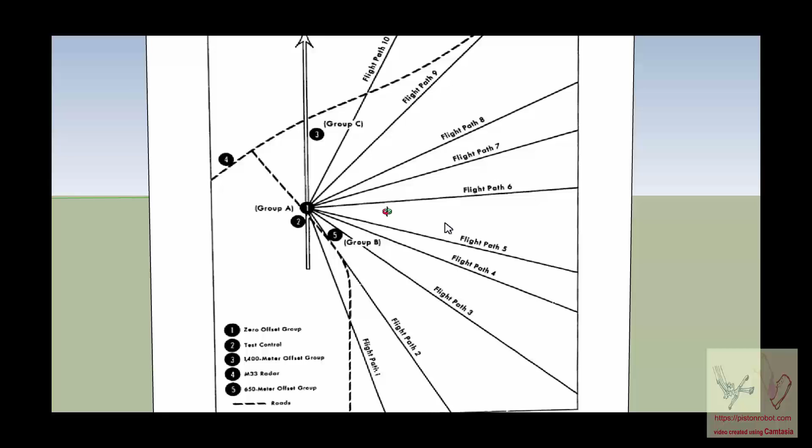All right, just in case, I know that you may be saying, what was this experiment exactly? So here's where they had one group. Here's where they had some other groups. And the planes would be brought out and come around and fly down a pathway, on this line versus that line versus that line. They were trying to see if it made much of a difference if you were flying into the sun or away from the sun or towards the sun.

And then they were also looking at if it was flying directly at you as opposed to you looking at it off from an angle. And scientifically, there wasn't much difference on that off-angle viewing. That also was a little surprise to me. But that's what they would do. They put these people out here. They would have the planes take off from somewhere, and they would fly down and get lined up, and then they would go down this flight path, and these people would try to figure out what is it that they're seeing.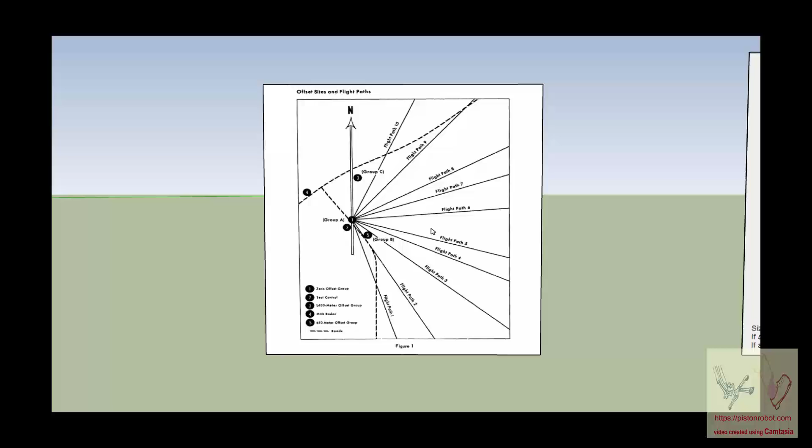So that's interesting. Now you might go, well, that's very close to what we're talking about with a Smart Mortar, but what were they looking at? They weren't looking at something that's 33 inches in size. And according to all of the science, it doesn't much matter that it's 33 inches in size. A 300-inch item is just seen 100 times further away than a 3-inch item. It's all an angle of view. So let's go see if that came out to be about what the science of vision would say is supposed to happen. Okay, and welcome back again.

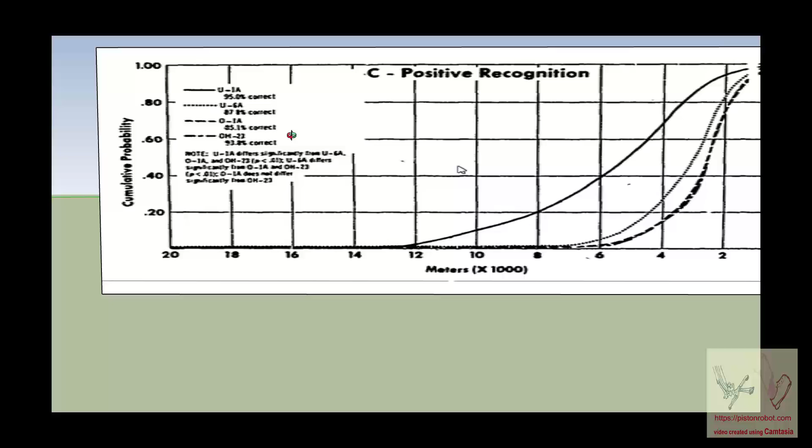As I said, I'm not a military pilot. I keep getting this mixed up. The one we're thinking about is the U-6A. So the U-6A was detected at 9,000 meters at the 50% level. The U-6A was recognized at the 50% level at 5,500 meters. And the U-6A was positively identified at 3,000 meters. Okay. I thought, well, that's interesting.

What does that mean? And I went out to the internet and just wandered around, and it turns out the U-6, U-1, all of those are designations of airplanes by the military when the military purchased an airplane and made it a military airplane because they just declared it to be a military airplane. But it was actually made by de Havilland, and the U-6A is one of the de Havilland planes. And I thought, okay, I will go into the internet. I will find some drawings of this de Havilland plane, the U-6A, and create a model of it.

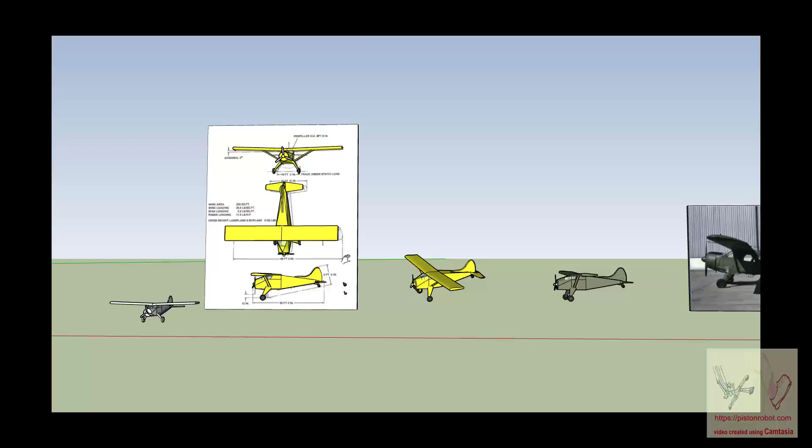And this is the model I created, and I have it as a bright yellow so you can see it. And I've superimposed the model that I created on these drawings, and you just have to take my word for it. These are drawings of the, I think it's the DHC-2, but it's the U-6A, de Havilland U-6A. And, you know, I got the wheels and the struts and the wings and the flight surfaces and the profile and the propeller. And this is all a three-dimensional structure.

Then I went and found one. There's a lot of history of flying involved, probably even now, but boy, in the past. There's plenty of pictures of these planes. These planes are definitely connected to the military. And that's the color scheme. So I went and tried to make for myself the color scheme of that airplane. And this distance, I think this is to scale.

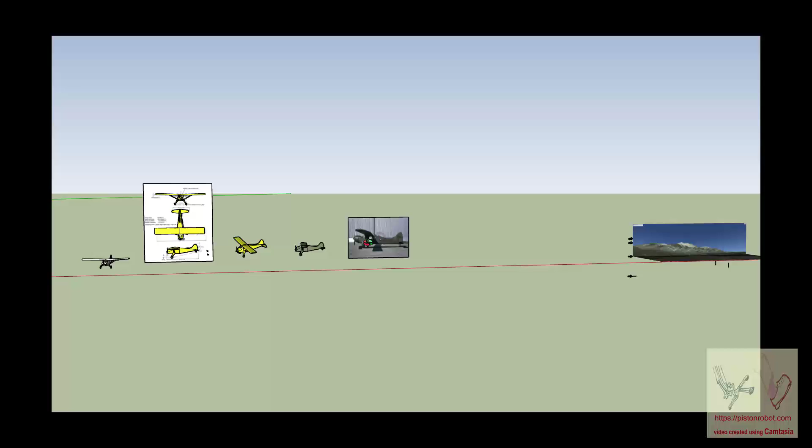It might be. I may have magnified it. Let's see here. We got to turn this. Okay, that's feet. So the problem that you get into with trying to show all this stuff is, that's 12,000 feet. So in order for it to be big enough to see it, it has to be gigantic. And you don't get it to the right size until you start working with it inside the drawings.

That doesn't mean anything. It's just, once again, confusing. But this, I believe, if I remember correctly, see, now we're into the fact that we can't display the real size in this drawing because we have these gigantic drawings also in the picture. So this can be fixed.

Okay, and so these are really the exact same pictures, but they're being shown by themselves in a drawing where the gigantic pictures of that landscape are not there. And you can see that I've tried pretty hard to have this plane, so that's 47.9 feet, to have this plane that I've drawn to be, and this is 47.6 feet. So this little yellow plane that I've created is as best as I can do.

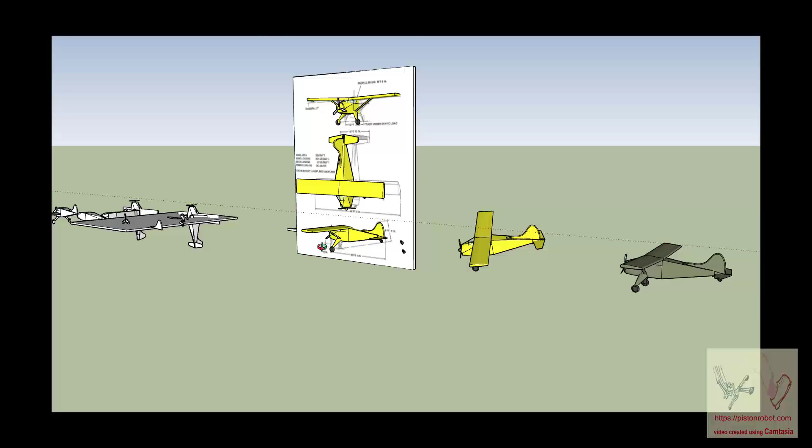I mean, other than spending a year working on it, to create a model of the de Havilland DHC-2 Beaver, which was the military U-6A. And there's the colors I picked for it. And then I thought I would show you, there it is flying along, and here's a little Smart Mortar down under it to give you some feeling for a comparison of the size of the Smart Mortar to the size of this airplane. And here I blew up the Smart Mortar.

It's about 8 times, it needs to be 8 to 9 times bigger. But the science says you don't have to do it that way. You do it by minutes of arc. And so here we have it for us to visualize. And let's go back over to those big size pictures and see what we see.

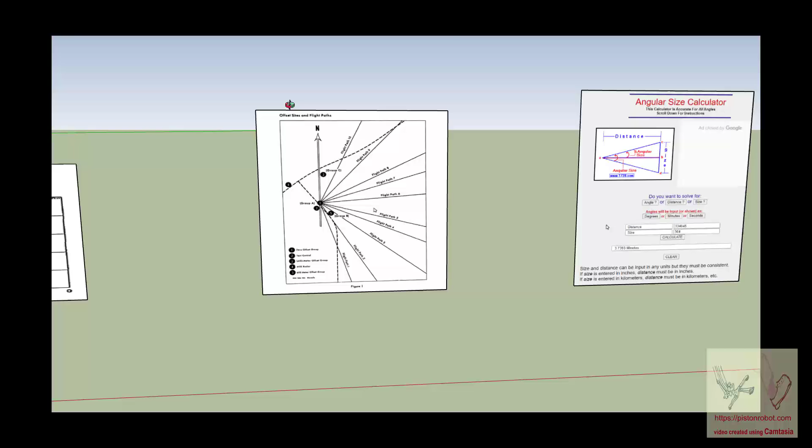All right, and we're back at the Primrose Path, and here are these gigantic versions of this airplane. And here is the mountains. And here is sea level. And here is 8,136 feet above sea level. So now the mountain is 13,600 feet like it's supposed to be. And we have our little guys down here.

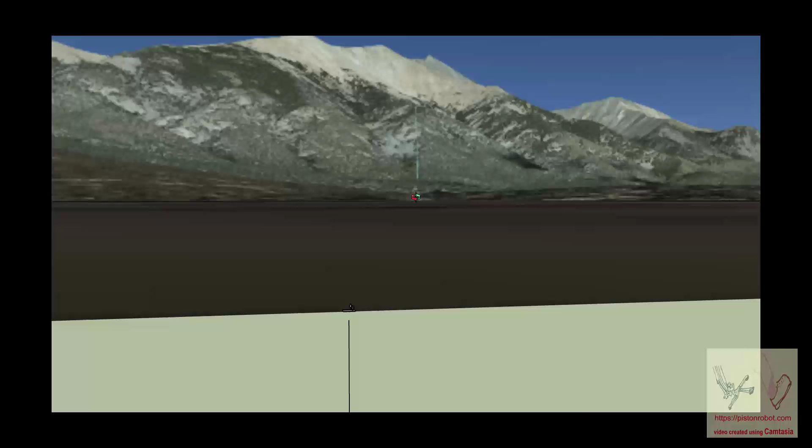And as usual, again, we have this terrible fight with trying to find our little people because they're so small compared to this image. But there they are. And they're looking up at the mountain. And remember, we're trying to say that they would see something flying up there. And this distance from here to here is about 4 miles. And look, there is something up there. And I put it in here for you, and there is that airplane.

That's 30 feet. That's 33 inches. And 30 feet. You can see that they are just barely even seeing that airplane. There it is. From their vantage point 4 miles out, there's the airplane.

And if I took the airplane out of that picture, you can see from a scale viewpoint, you would never see that Smart Mortar. And I put in here some distances just to help you convince yourself, but that's 4 miles. So that's 4 miles. There's these little tiny guys here. Okay. Looking out over this land to see these, there they are. And 4 miles away from them, across this land and up to the top of this mountain area at 7,000 feet in the air, is this airplane.

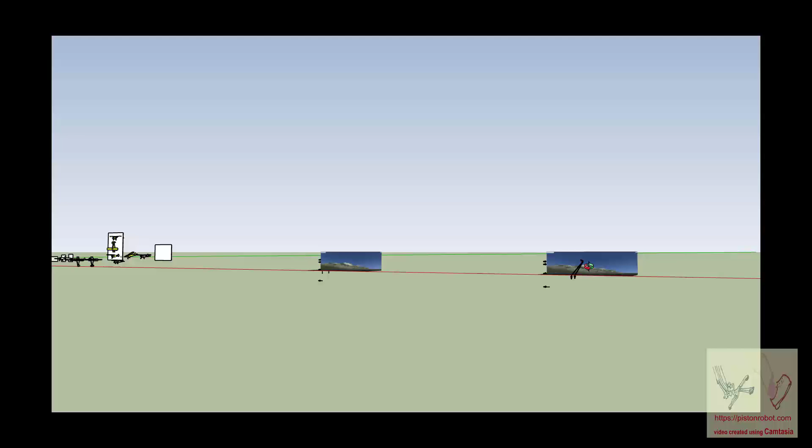And I've actually been hiding from you in these drawings, and it's even hard for me to do it, but somewhere up in here is the Smart Mortar. This is a Smart Mortar up there in the picture when the airplane is not there to help find it. And I can't even find it. It's in here somewhere. But I'm trying to give you a demonstration that the Smart Mortar is just completely and totally invisible to these people. This picture is the same as that picture. And the other thing I did is this picture.

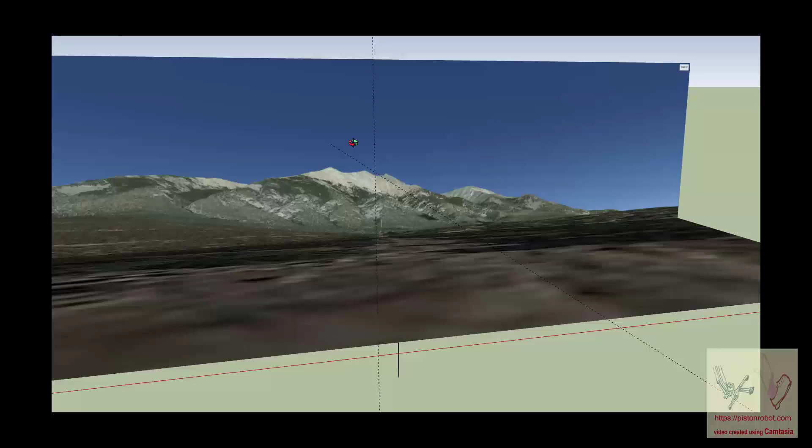Okay, back in here, there's the Smart Mortar right there. Right there. So there is where it is, up here at the top of the mountain. That's what I couldn't find before, but there it is. And this point here at this cross mark, there's another Smart Mortar right here. That's that little dot right there. That is the place in this profile where the Smart Mortar would begin its downward flight. Right there.

And if you go down here and get yourself in the position of these guys and have them looking up at that place in the sky where that crossover occurs, they're not going to see that Smart Mortar at all. And it's just amazing. So that gives us the ability to continue to work on the Smart Mortar. There's a lot of aeronautics that I can talk about, and that's a whole separate set of lectures.

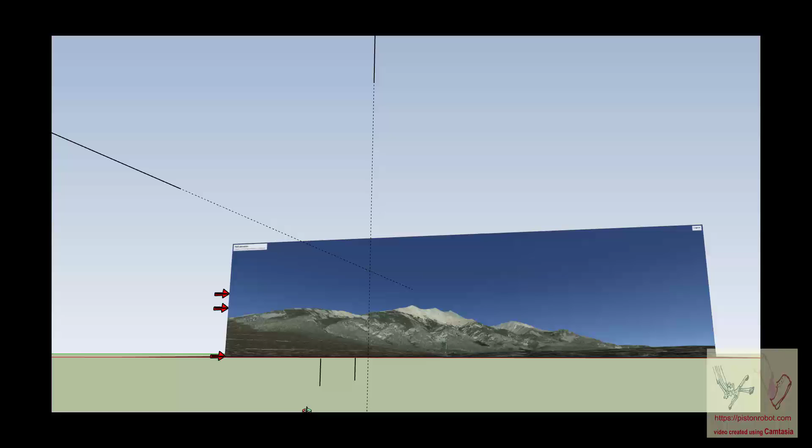But what it means is it's okay that the Smart Mortar goes 7,400 feet in the air, turns itself into horizontal flight, and flies over to land on the enemy forces. They will never see it. They clearly are not going to hear it because it doesn't make any noise. And that, I think, makes it a significant weapon.

It is my hope that it's enough of a significant weapon that people will just decide that if the military wants to own this 4 mile diameter circle of space, the enemy forces just won't be there. But since it has flight control surfaces and can fly and compensate and keep up with where it is and impact where it's supposed to,

it means that the U.S. forces can just put these wherever they want to, which means that the enemy forces will constantly have this thing landing on them that makes no sound, that arrives when the American forces feel like sending it. It's 4 pounds of C4 plus shrapnel. And they have no idea when the Americans are going to launch it, and they have no idea if it's coming. And they're not going to be able to see it or detect it.

And maybe, I mean, it's all a lot of curves. I don't know if it would reflect radar or not, but that's a very sophisticated radar installation to pick up that smart mortar. And if they're broadcasting that kind of radar energy, there's all sorts of radar seeking missiles that will just take out their radar facility.

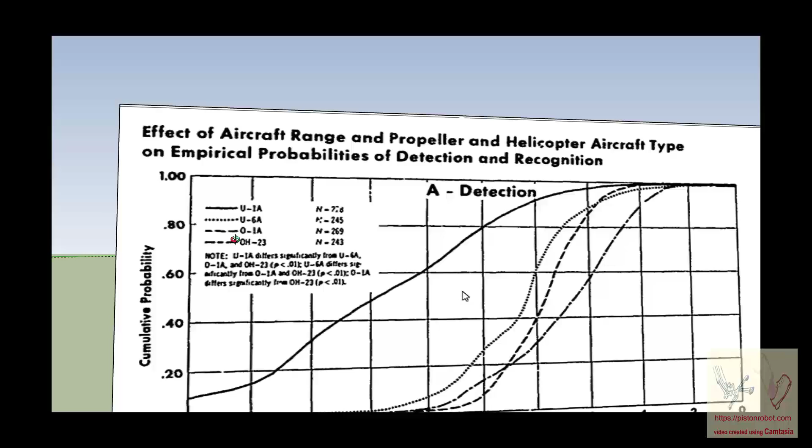All right, and here we go. I have to bring to your attention that I keep getting myself mixed up about the planes. So this is detection of the U-6A, detection at 8,500 meters. Okay. Tentative recognition U-6A at maybe 5,500 meters. Okay, so U-6A, 5,500 meters.

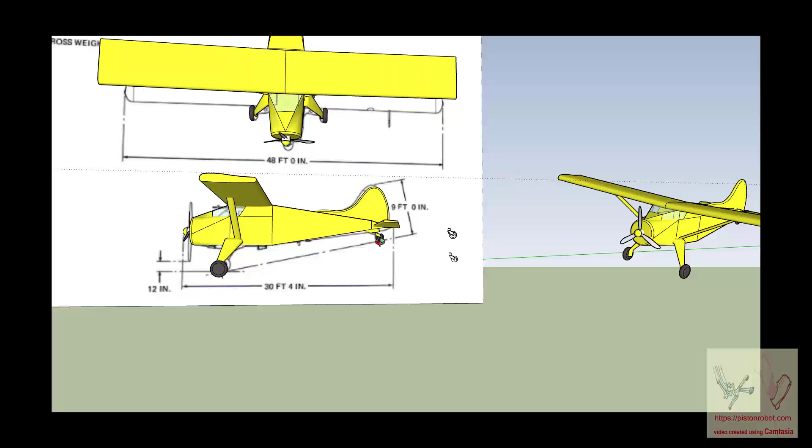And here is the U-6A where we're attempting to get a size value, 30 feet and 4 inches. 30 feet is 360 inches. So 30 feet and 4 inches is 364 inches. So tentative U-6A, 5,500 meters, identified, 364 inches.

So now 5,500 meters is 216,535 inches. So 216,535 inches compared against 364 inches worth of size comes out to 5.7 arc minutes, which is precisely what we've been saying all along. In this exact scientific study, where they really used real stuff and real people, tentative recognition should have been at 3, maybe 3.5 arc minutes. When it got applied to the actual real world with real items flying around in the sky and people looking at it, it turns out that it was 5.7 arc minutes.

And what we've been doing with the Smart Mortar has been keeping it at 2 to 3 arc minutes, which is way tighter than what the real actual science showed with actually real things flying in the air. And what that means is, in terms of the Smart Mortar being non-visualized, not perceived, and probably not even that you can see it if you tried to see it, you're just normal people in the absence of very sophisticated technology.